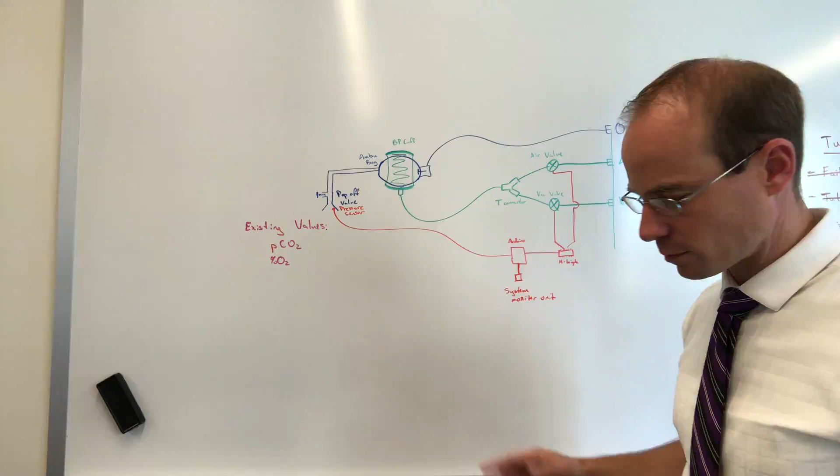Pressure will be monitored by a pressure sensor, and that information will go to the Arduino. The Arduino will be aware of both configurations, whether it's in a pressurized or a depressurized state, and that will be noted and confirmed with the pressure sensor itself.

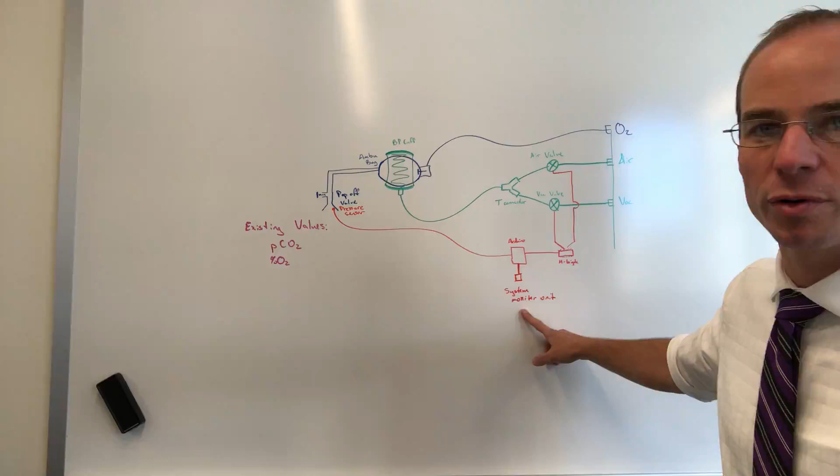Let's see, what else? The system health will be monitored by a system monitor unit. This unit will be receiving continuous voltage from the Arduino. If that gets stopped, the system monitor unit will enunciate an alarm, audible alarm.

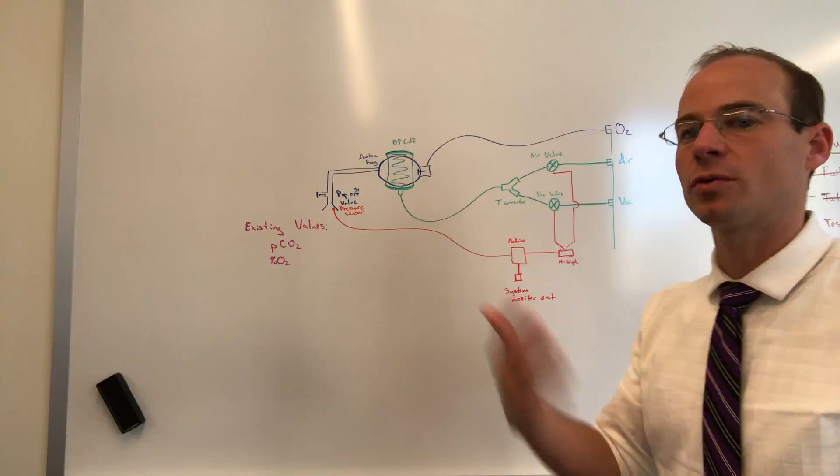If any of the other system failures occur, i.e. the pressure sensor does not notice an increase in pressure when it's supposed to be, or a decrease in pressure when it's supposed to be, the Arduino will send a signal to the system monitor unit or some sort of an audible alarm, and it will make an audible alarm.

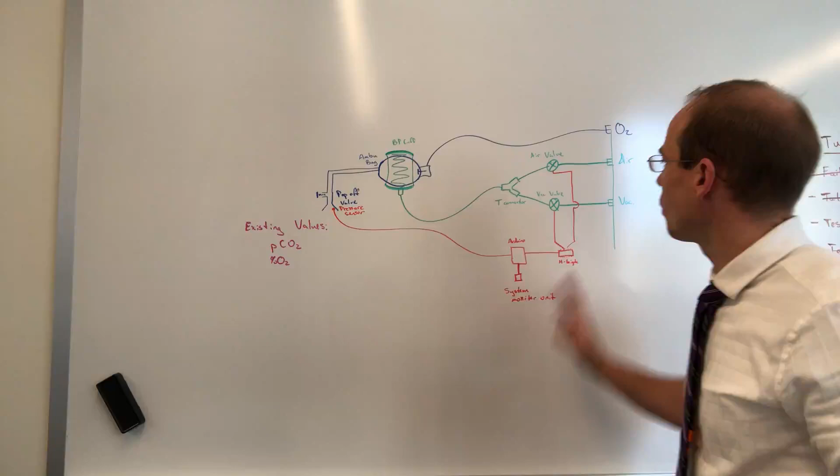If we have a power failure in the H bridge, or we have a power failure in the Arduino, the system monitor unit will no longer get the consistent voltage, and it will make an audible alarm. So all of these systems will have some sort of audible alarm.

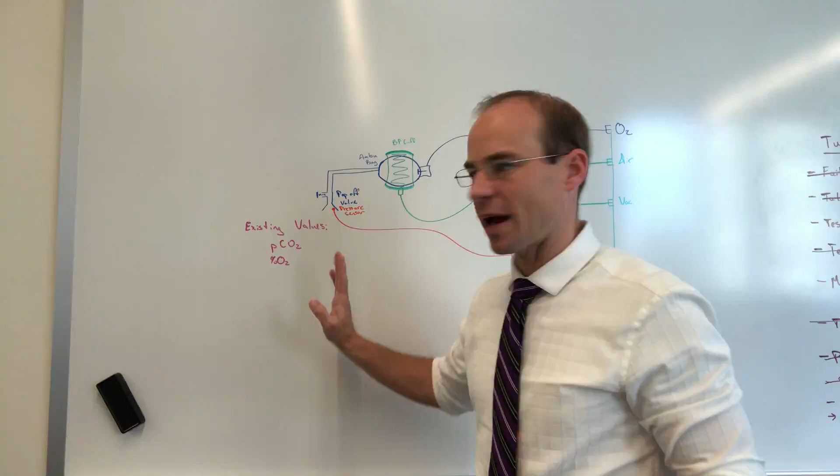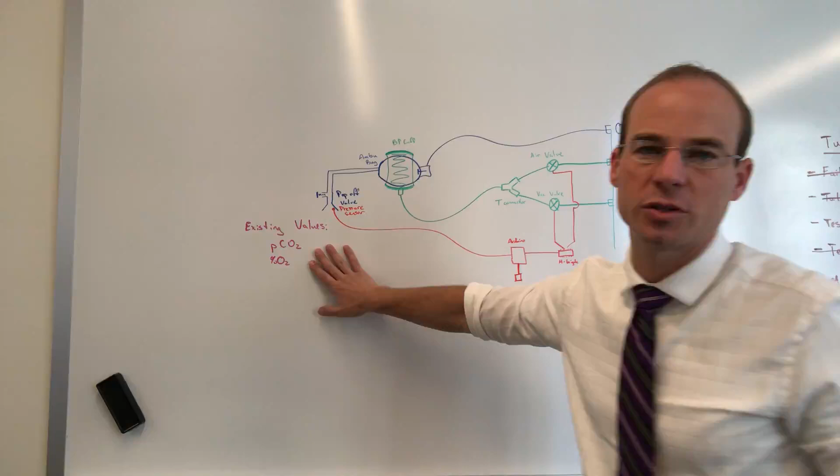Now, on the patient side, we will have PCO2 breathing out, and we'll have O2 on pulse oximeter as well as in the airway. These are external alarms that will come from the patient room, so we won't have control of those, but we will recommend that those be utilized. And that's not actually in the mitigation procedure right now, but eventually maybe we should have that in the mitigation procedure as a secondary line. Okay, that's how the system works, at least right now.